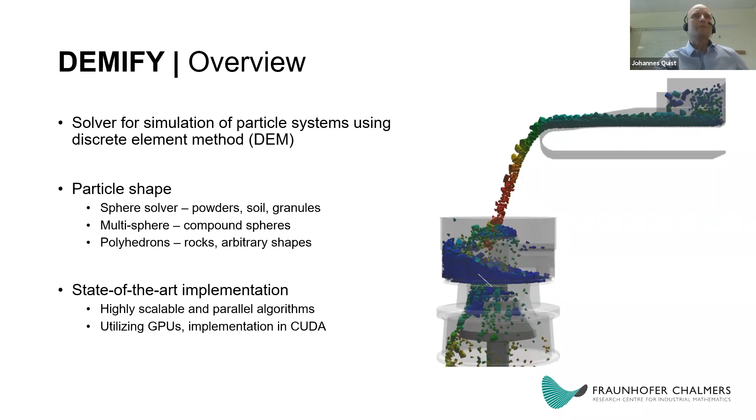DEM very briefly works essentially like this: you set up some kind of input for this particle system with geometry and particles and so forth. Then we need to identify all the contacts between all the objects in the system, calculate the forces, and update the positions and velocities. Afterwards we can have a look at this and post-process the data. But those are the essential steps.

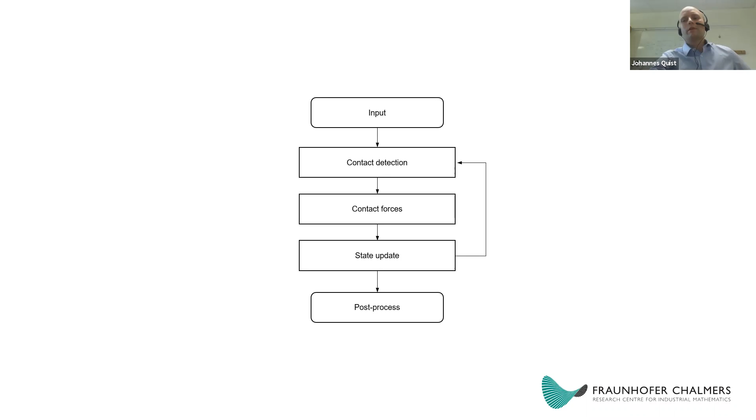The key here is to be really, really efficient in these main steps, and that's where you get the major performance leverage. So I will start with going into some technical depth, and then we will go into some case examples where we look at two different cases where we have used the DEM code.

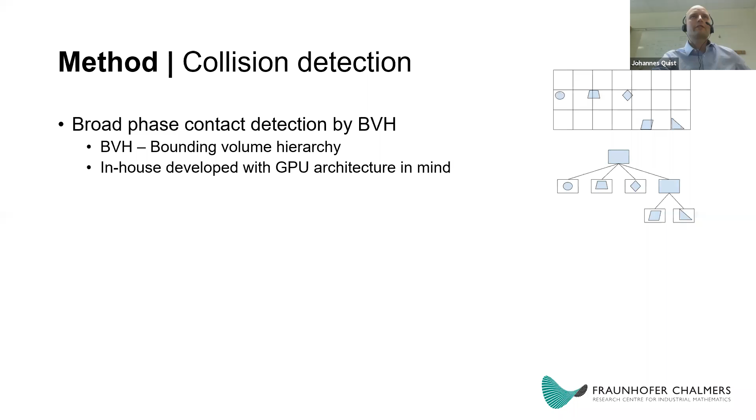Collision detection we do with something called bounding volume hierarchies. This is the way that we identify which particles are close to contact, and this is implemented on the GPU as well, making that search very fast to find contacts. Then we calculate the specific overlap between particles to calculate the forces.

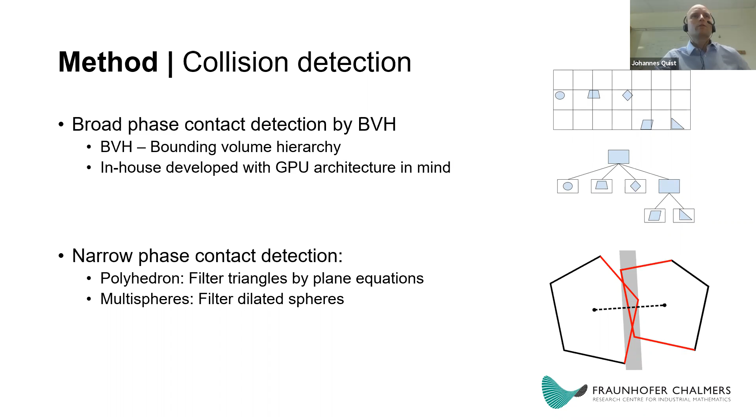We do that in a very specific way that's very efficient for polyhedral particles. Historically, a lot of DEM implementation has been with spherical particles, where the overlap calculation is very simple. When you move to polyhedral particles, it becomes more complicated to calculate the overlap between triangulations. So Adam Bilock has developed a very efficient algorithm for this.

First, the triangles are filtered by plane equations, and then we compute the intersection nodes. From that, we can compute the properties in terms of the overlap. This implementation scales near linearly with particle resolution, meaning that if we increase the number of triangles per particle, it scales near linearly.

The implementation that Adam has done enables us to have non-convex particles, so they can have more rock-like shapes, and this is critical to properly model rock particles. You'll find in literature that a lot of codes only handle convex particles, and it's a bit more complicated to achieve this property of non-convex particle shapes.

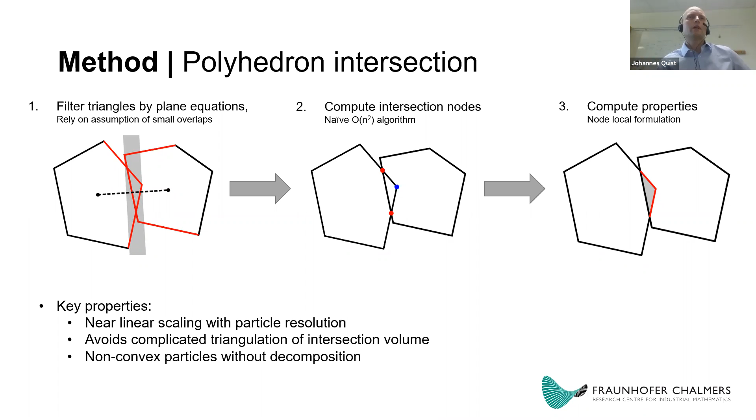We do the force calculation based on the volume overlap. I wanted to illustrate this because most other codes do it based on the distance in the overlap. But if you look at this image, these have the same distance in terms of overlap, yet this is the same particle oriented in 3 different ways, so the volume will be totally different compared to the distance. So volume is a better and more accurate input to the force contact model.

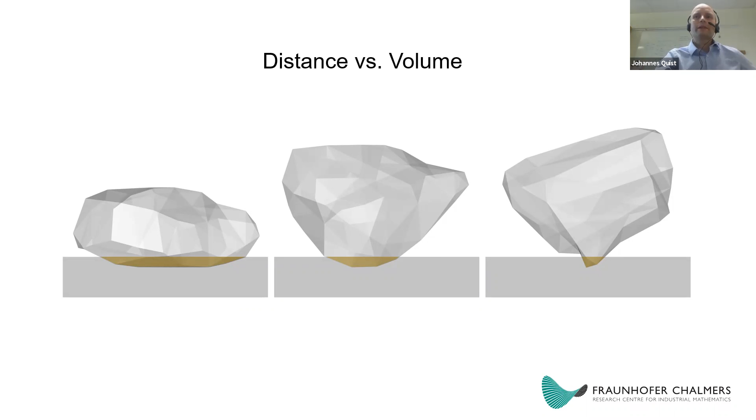So how do we arrive at different shapes? What we have done is 3D scanning of rock shapes. Here you can see 3 different shapes, and in this image they are made up of 100,000 triangles, which is way too much for us to include in the DEM simulation.

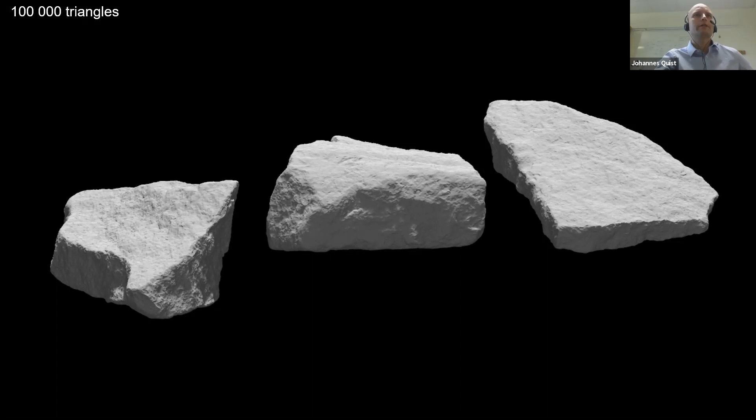So then you can apply an algorithm to decimate the number of triangles, going down to, for instance, 1000. You can see we lost a lot of the detail resolution, but we maintained the general shape. Then going further down to 60 triangles, that's much fewer, and that's something we can simulate, but we retain the general overall shape of the particle with its non-convex features, aspect ratios, and general particle shape.

Okay, so that's about the shape.

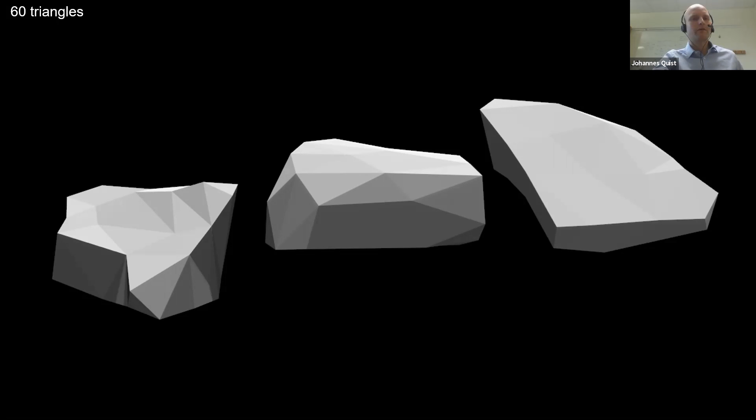What I had some issues with in my previous DEM modeling life was how to efficiently interact with DEM software as an engineer. So we have been working a lot with different interfaces so that it should be streamlined for the engineering context when you actually use DEM for real engineering projects.

So we have two main interfaces you can use to build up the DEM model. The first one, we have configured the core, the Demify core, so you can import it as a regular Python library. If you're familiar with Python, you realize this is very versatile and easy to get going with. It's also very good for setting up batch simulations if you're doing optimization or evaluating parameters. Because you're essentially accessing each of the sub-modules in the DEM core from this Python module, you can do whatever you like and build very advanced DEM setups.

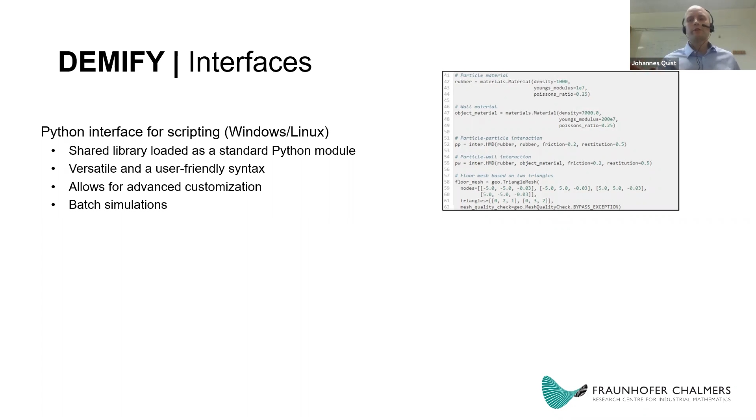Still, maybe this is a bit for the advanced user, so we also have the graphical user interface. This is built on something called the IPS platform, a software platform developed at FCC. There are 7 or 8 different modules for robot simulations, cable simulations, virtual paint simulations and so forth. The IPS platform has hundreds of customers and thousands of users, so it's very good for us that we were able to utilize that platform for building the graphical user interface. We can do both the pre-processing and running the simulation, and then also post-processing inside the IPS.

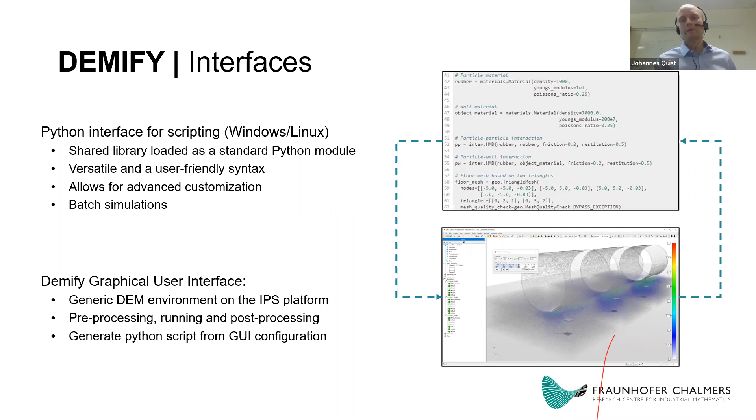What we have recently developed is a capability that when you run the simulation in the GUI, it will automatically generate a corresponding Python script. And of course, simulations run in the Python environment can be opened and post-processed in the GUI. This is very good because in the GUI, when you position geometries and do the basic layout, it goes much quicker since you can directly review what you're doing. But then you have great power in the script interface for moving forward with batch simulations, for instance.

Okay, so this is the graphical user interface, and I will quickly go through the different steps to set up the DEM simulation. Basically, you see all of the different parts here in the tree structure.

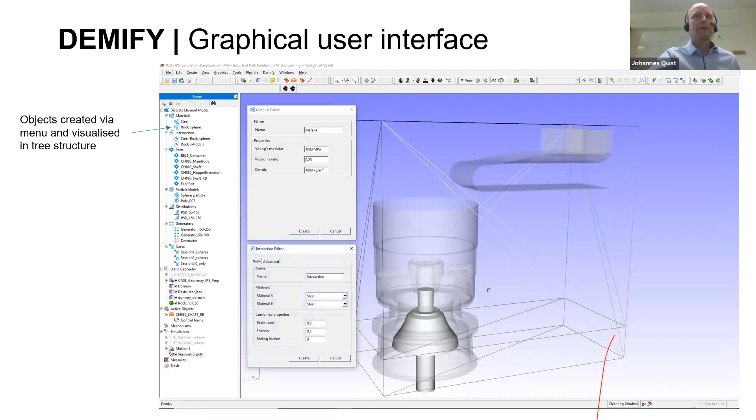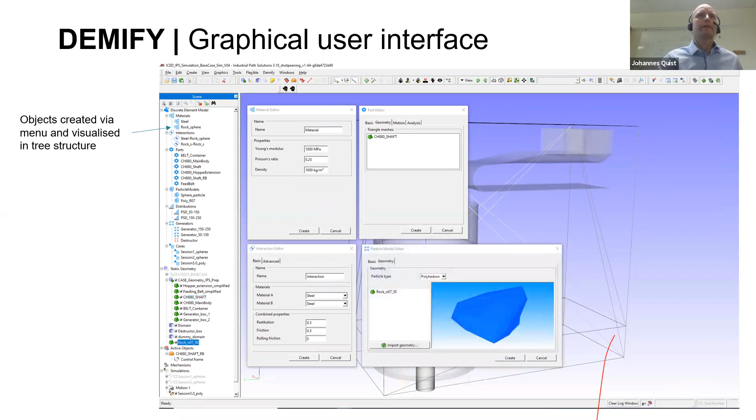So we start with creating a material. We can define interactions between materials, for instance the friction and coefficient of restitution and so forth. Then we can create the DEM part, and you can import any number of geometries into the tree and use the ones you'd like for a specific part. We can create particle models, in this case a polyhedral model, by just dragging and dropping in a shape like this.

We can create particle size distributions of different kinds, and then a generator, that's where we insert the particles into the simulation. For instance, we have the frequency of insertion, when it will start and stop, whether we define it by number of particles or total mass. We can also move this generator in the domain, and we can have arbitrary shapes where particles are created.

Then we also have something called a destructor, and we can use that for defining that if particles enter that domain, they will be removed from the simulation.

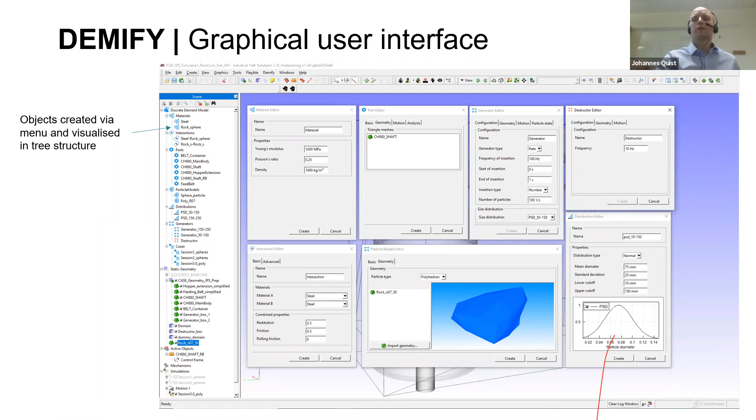This is a feature that might look like a detail, but it makes a huge difference when you work with this tool as an engineer, because from these building blocks you can build any number of case recipes. So if you're evaluating 3 or 4 different conceptual solutions, you can build all of those case recipes in the same scene and run them, then open up and review those results simultaneously, which is not possible in other software.

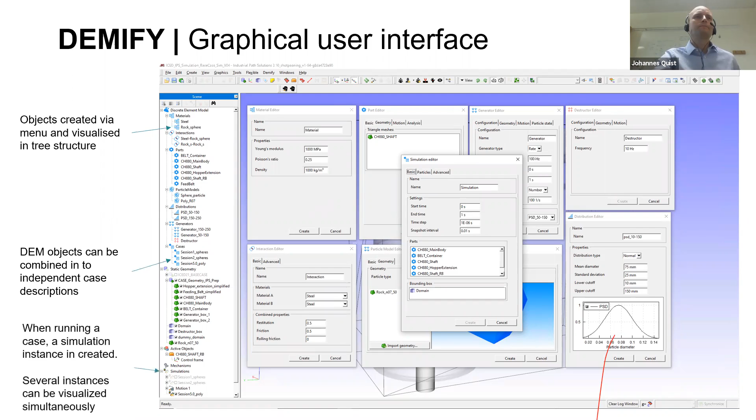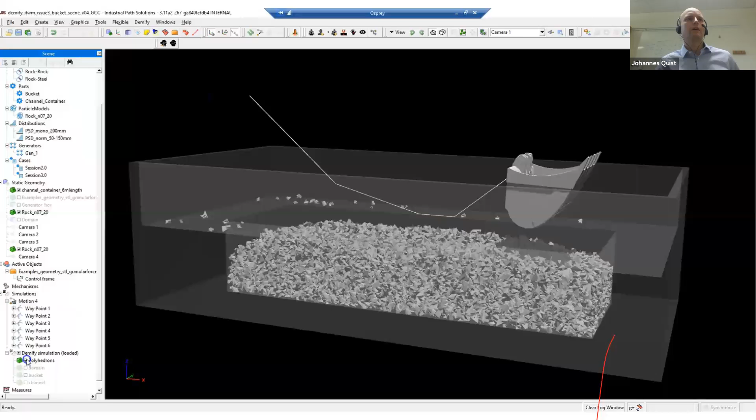I also want to show something about working with movements and motions. I've sped up this video by a factor of 3. Here we can define something called waypoint motion, so this excavator bucket moves along this line. I've already performed the simulation, and you can see how this bucket moves down into the material and digs through. You can also change the color using different color schemes, and we can have predefined camera positions. Here I'm lowering the transparency just to see what's happening inside the pile.

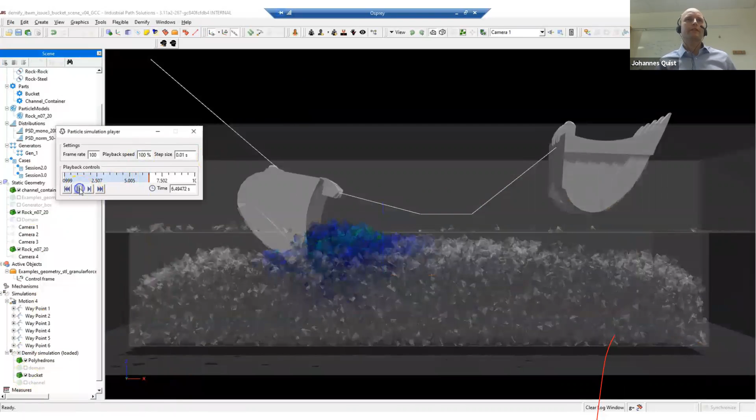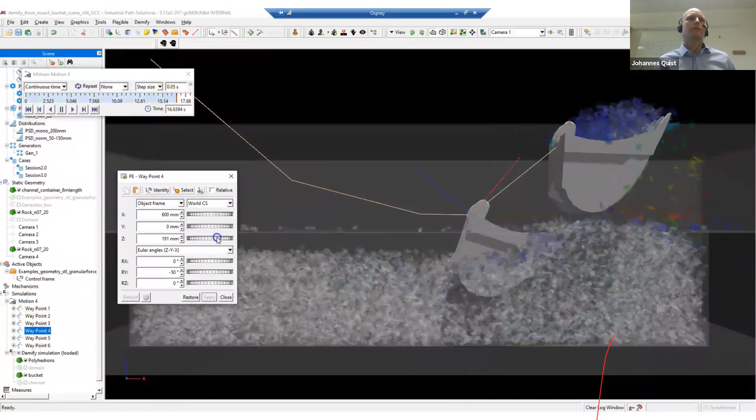Because of the independence between the definition of motions and the DEM simulation, I can go into this motion and modify it if I want to make a separate new version of this waypoint motion. So I just lowered one of the waypoints, and then I can run the simulation again and get a second version. You can work iteratively like this, which is very good from an engineering perspective.

I just want to mention we have spent quite some time on building an API and documentation, but let's not go into too much on that.

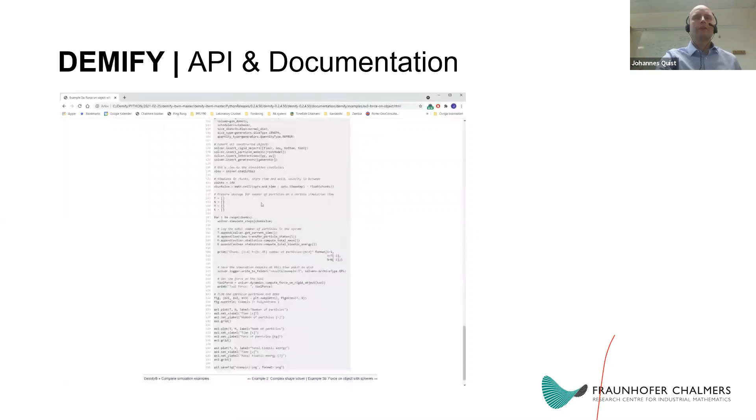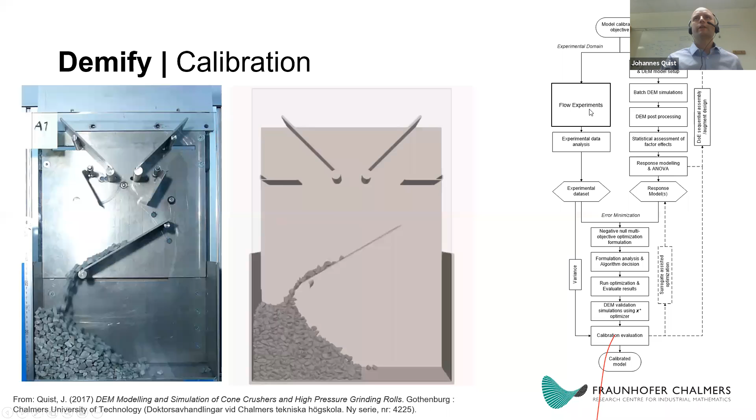I would also like to mention the key importance of calibration. This is something I worked on previously. We have a methodology on how to work with experiments and simulations to arrive at a calibrated set of contact model parameters.

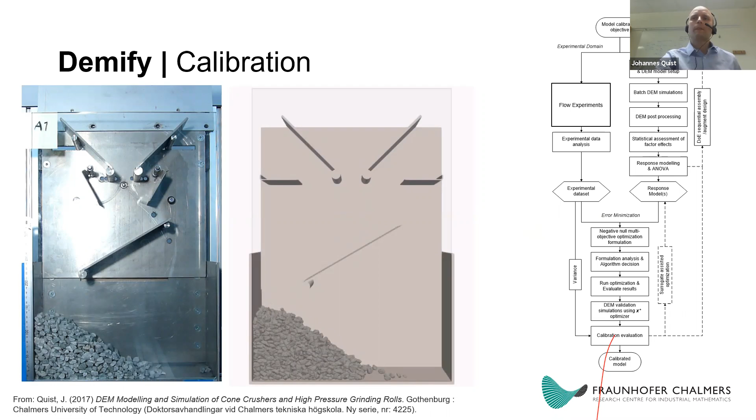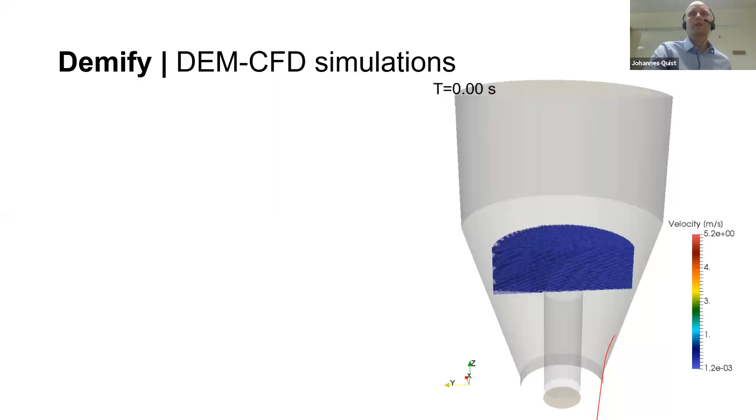It's important to mention that we worked a lot with DEM-CFD simulation, and I know some of you have also done that within the GCC. Mainly we have worked together with the pharmaceutical industry. This is an example of a Wurster coater. In this simulation we have 1.5 million spherical particles running on the GPU, and this is used by a large pharmaceutical company on a day-to-day basis in their development and process work.

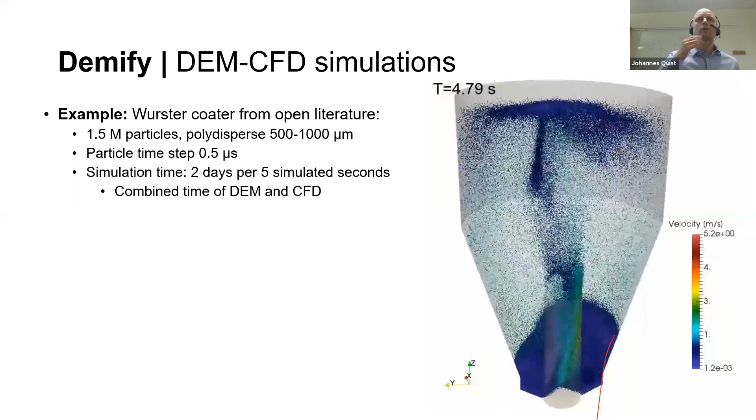I would now like to demonstrate a project that we have been working on for the past 1.5 years. It is not a project within mining, but within infrastructure. I think it's still relevant because it involves rock material and a different kind of machinery, but I think you will see some links to minerals processing equipment if you just use some imagination.

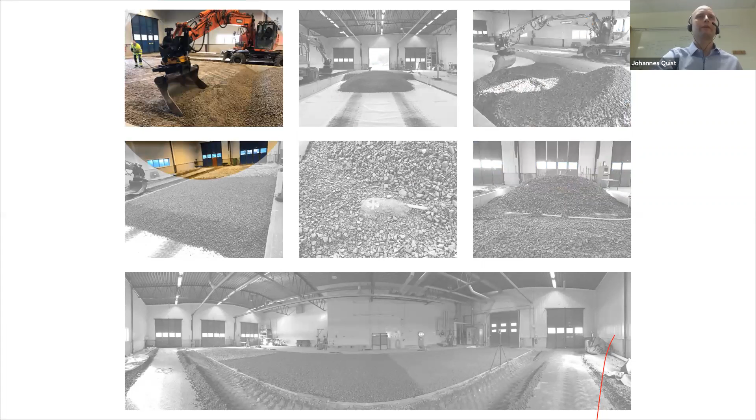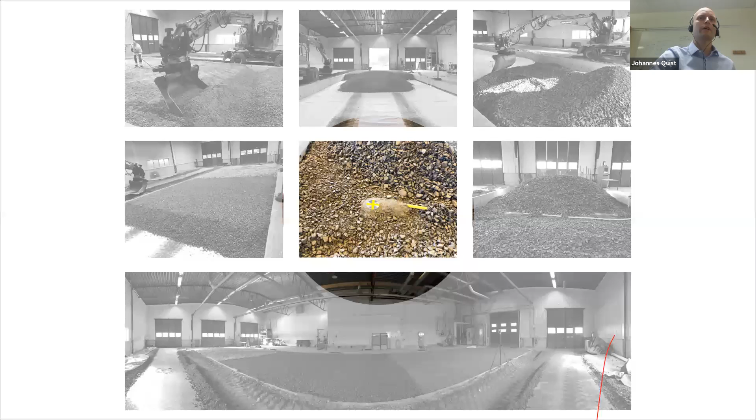Here in the top right corner we see the 8 to 90 millimeter material, and here we have the 0 to 32 millimeter base course aggregates. We also buried pressure sensors to be able to measure the forces and pressure inside the bed to compare with the simulations. And here is the final bed ready for the experiments.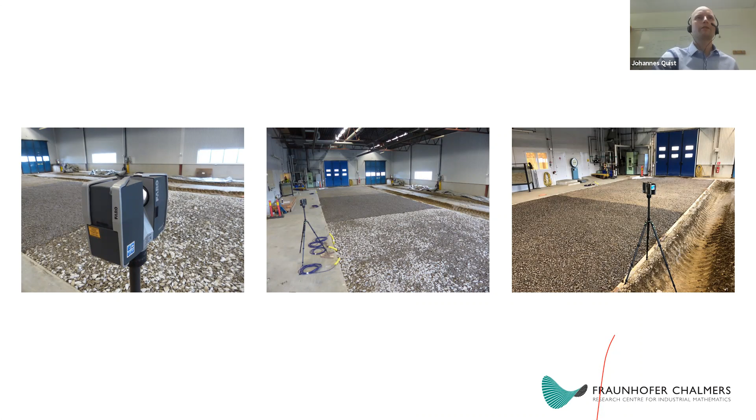We also utilized a lot of 3D scanning. We scanned at 6 positions before we started moving across the surface, and then after every second passage with the roller compactor, so we could use that 3D scanning data to extract sub-areas for estimation of deformation. These surface plots show the point clouds for 12 passages, and from that we can extract the deformation as we sequentially pass over with the compactor.

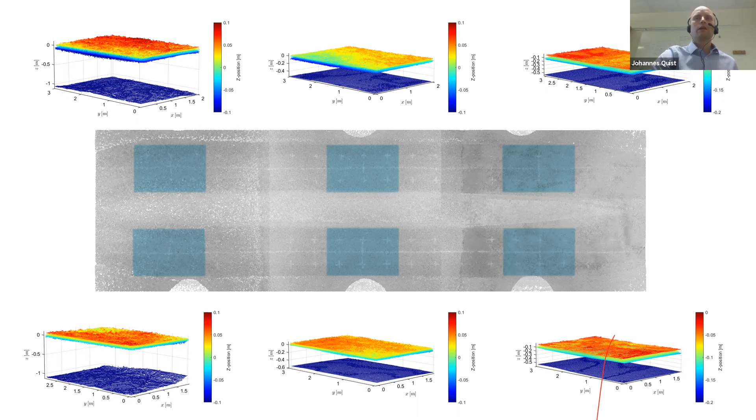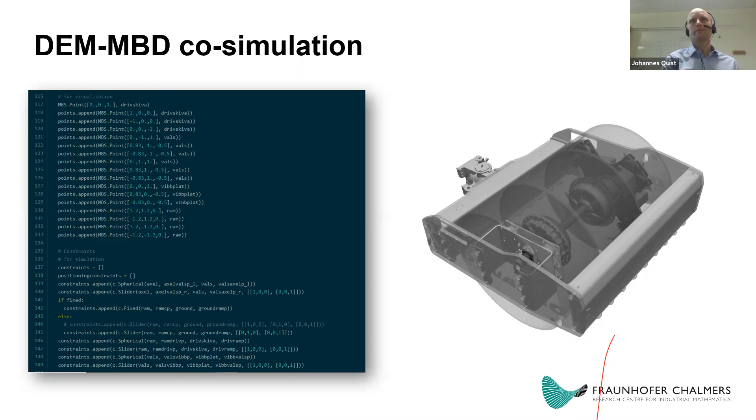And there's quite a lot of details regarding the simulation of this system. We had a master thesis last year, and Johannes Göransson was the student, and he built a complete multi-body dynamic solver in Python that he then linked directly into with the Demify Python interface. So the complete dynamics of the roller compactor has been modeled and is included in the DEM model, including the stiffness of the rubber buffers and the stiffness of the frame and so forth.

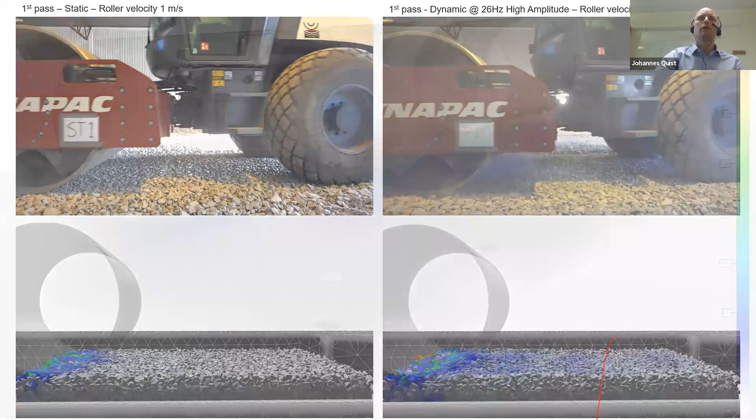Okay, so jumping forward, here's the comparison between the experiment and the simulation. First for static and now for the vibrating case. And here we can see, to the left, the static passage, where we just roll over without vibration.

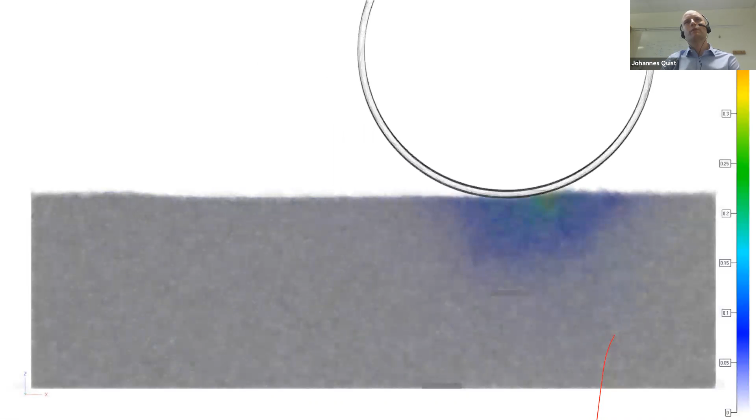And then you see the first and second dynamic passovers. From the side with some transparency, we can see the movement of the particles below the roller, now with the static pass, and then here with the dynamic pass. Those of you who work with HPGRs should take notice here in terms of this coupling method and so forth.

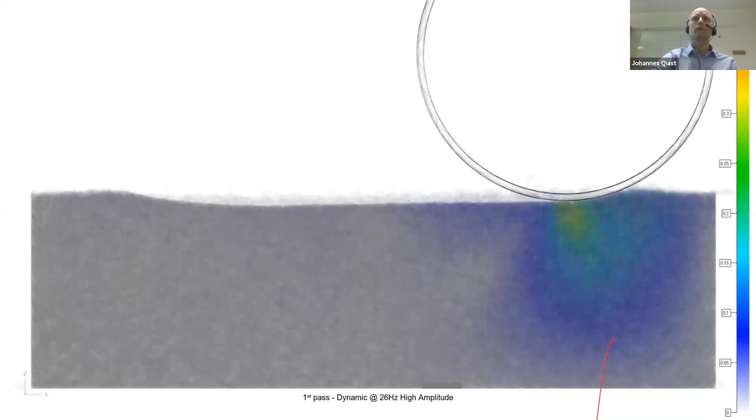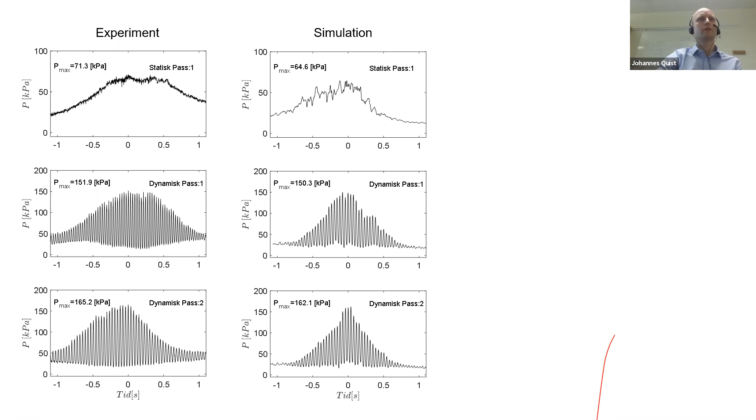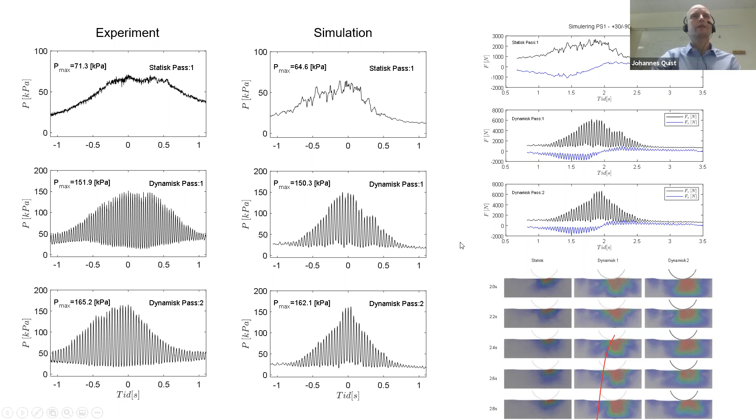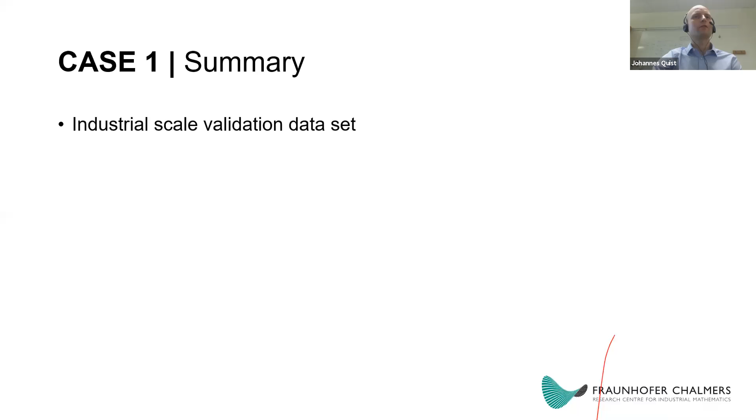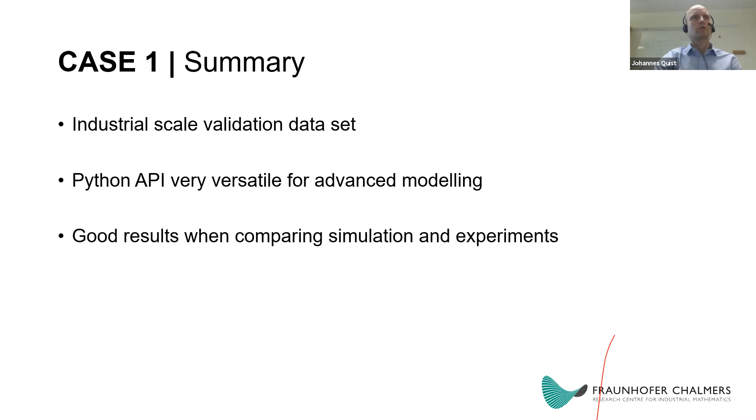So summarizing this first case, we have a very good industrial scale validation data set to move forward with publications on. Setting up this experimental campaign is based on the knowledge I've acquired through surveys done in the minerals processing industry. This case also shows the versatility of utilizing this Python API in Demify for advanced system modeling. We're quite happy with the simulation results so far, but there's more to be done for sure. The next step we're working on now is to implement this solution with the clients, to integrate it in the R&D process for developing these roller compactors.

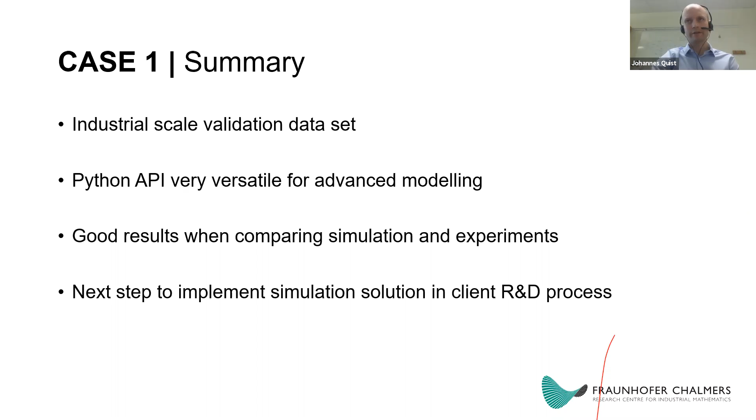Okay, so now a second case example. This is a project we did earlier this year. I cannot disclose the client, but it's in the mining industry, and it concerns the feeding of a recycled cone crusher. We did this project in collaboration with the Liner Design Service and Rock Team.

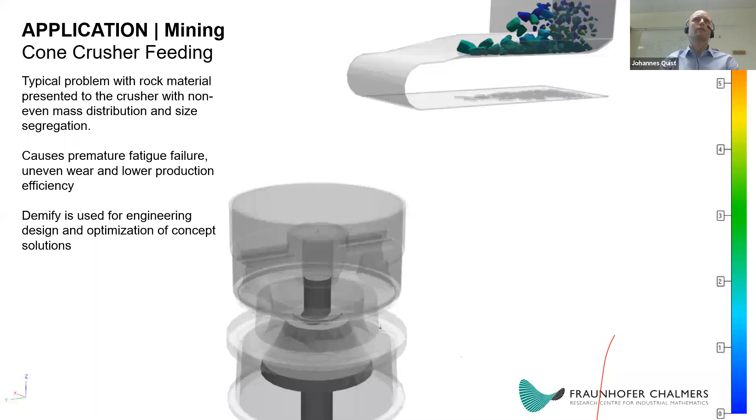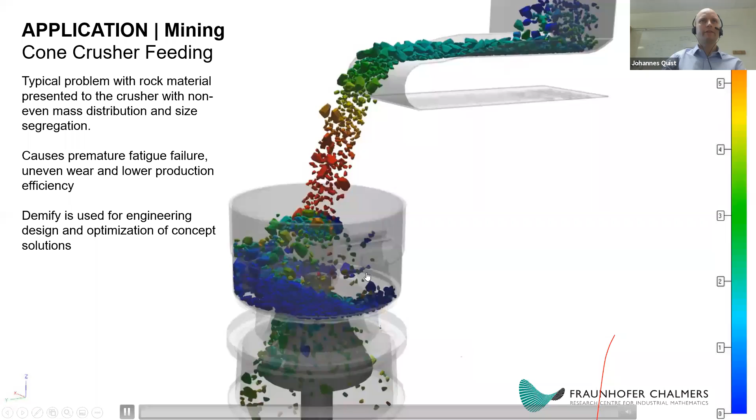Before showing the results from that project, I want to show the generic situation of feeding a cone crusher. It's very common that they are fed like this. In this case, the particles hit the spider cap pretty dead on, but the momentum of the large particles causes a splitting action, so the larger particles end up over here and smaller particles flow down here. We also have more material on one side than the other. This breaks crushers. And as Magnus usually says, all crusher performance optimization starts with proper feeding.

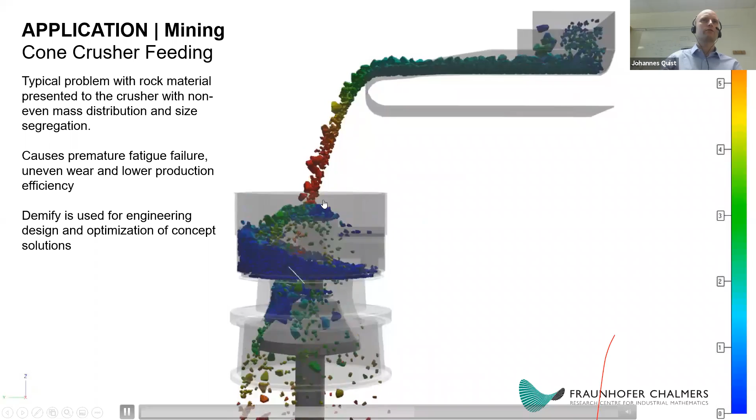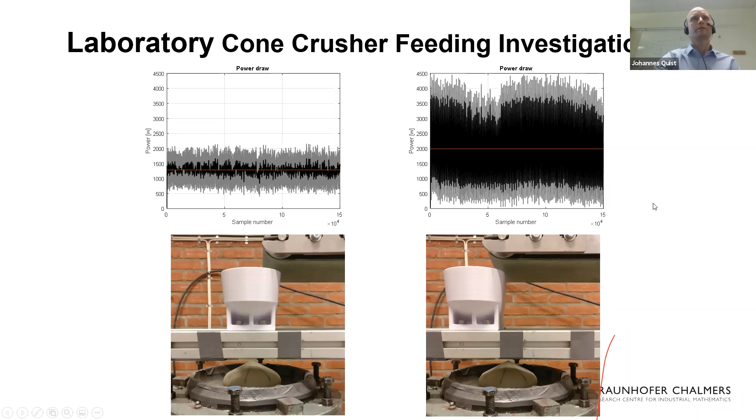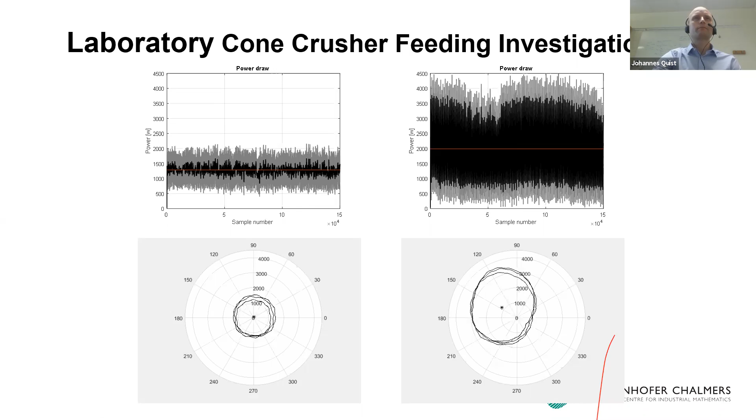So we always start with simulating the current arrangement, because if we cannot replicate the current situation, you shouldn't really go into concept evaluation. So that's always the first step.

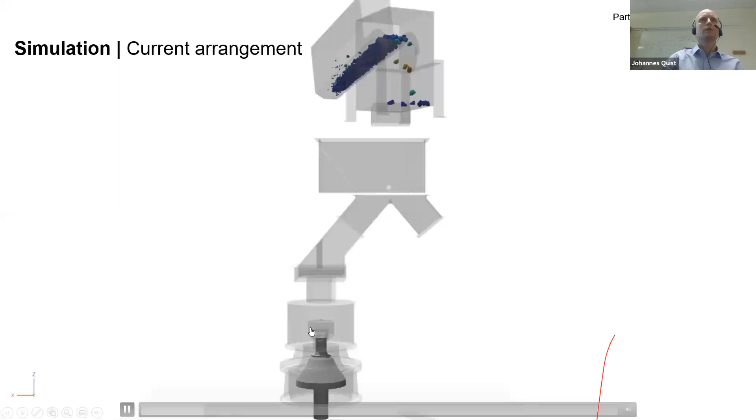So we worked iteratively to do that, and that might mean you find geometrical differences on drawings. You might need to 3D scan the actual geometry. Sometimes there will be ledges, like in this case, this ledge had been welded on. Without that, you have a completely different flow behavior.

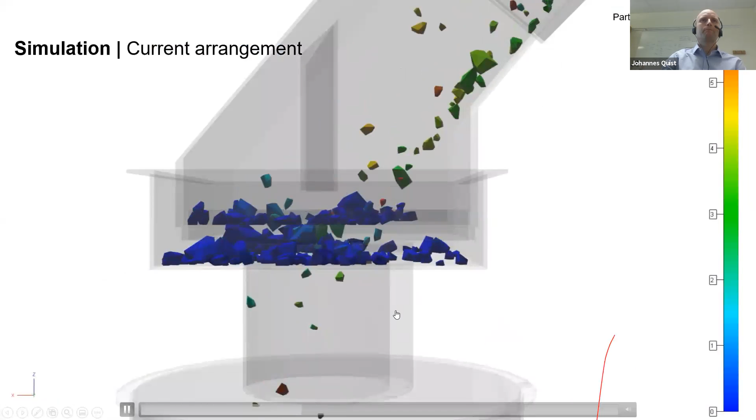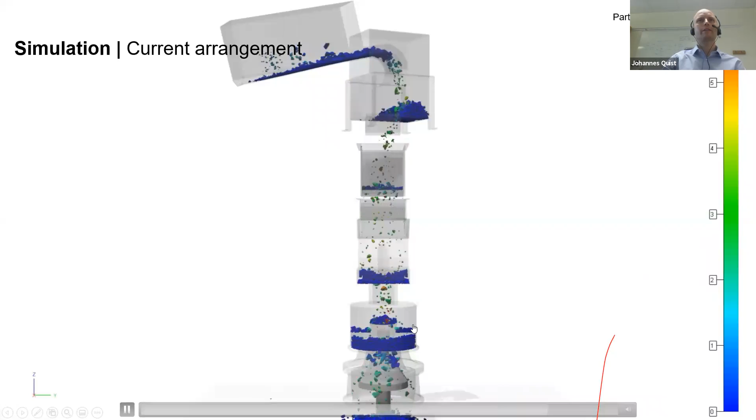So we'll skip ahead a bit here. Basically, we found that this crusher will be, under most circumstances, have a misaligned feed. So that was the conclusion from the first step.

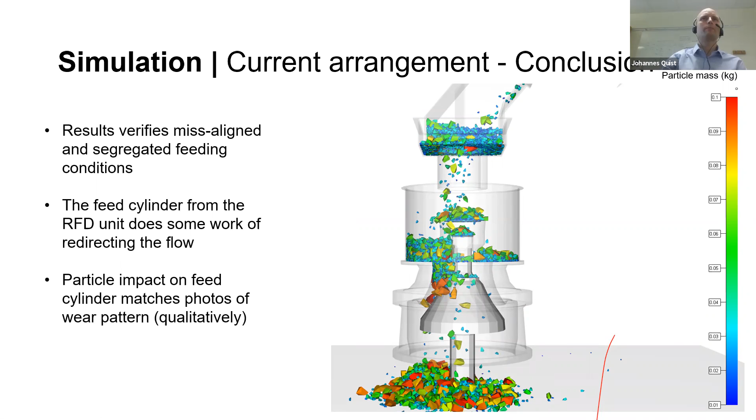Okay, so we could verify that problem, and we can also see that the wear pattern makes sense that it wears on this pipe here.

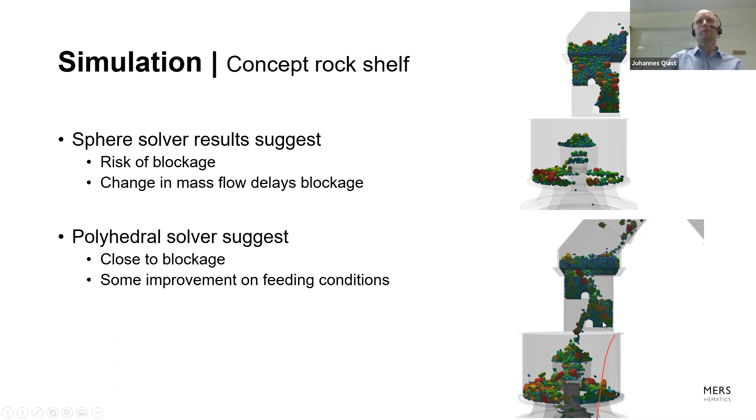So then the concept solution had already been proposed, consisting of a rock shelf design. And we investigated if that would be a proper solution. And we found that there's a very high risk of blockage. You can see it here with spherical particles, and it's very close to blocking when we simulate with polyhedral particles.

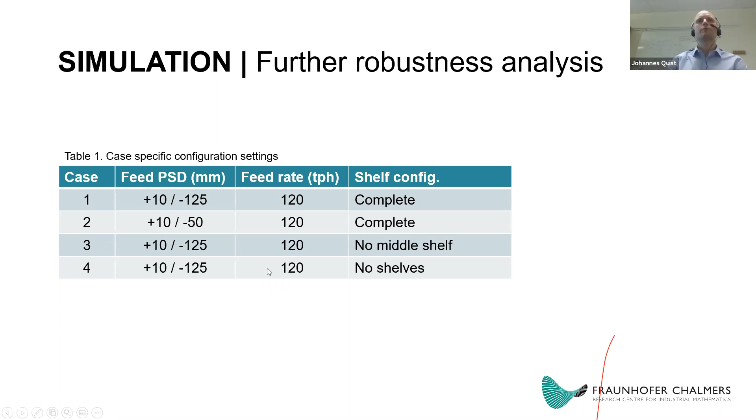So then we moved forward to see, could we investigate that concept to make it function? We simulated a couple of different states, and we separated the distance between these shelves to open up the solution. And the way we did the analysis was that we compartmentalized the crusher into 15 or 16 different domains.

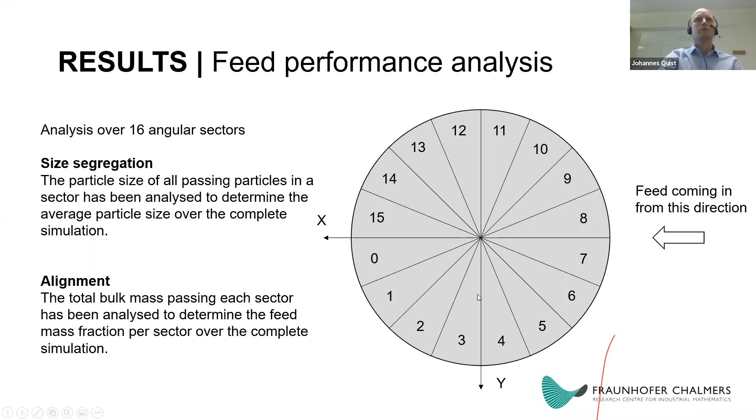And here we can measure the mean size in each of these domains, and also how much mass we have. For perfect feeding, we want equal mass in each one, and we want equal size distribution in all of those. Then we have something to measure and optimize against.

So here we can see the four different cases that we evaluated in terms of the alignment. And for perfect alignment, we want all of these bins to have the same height.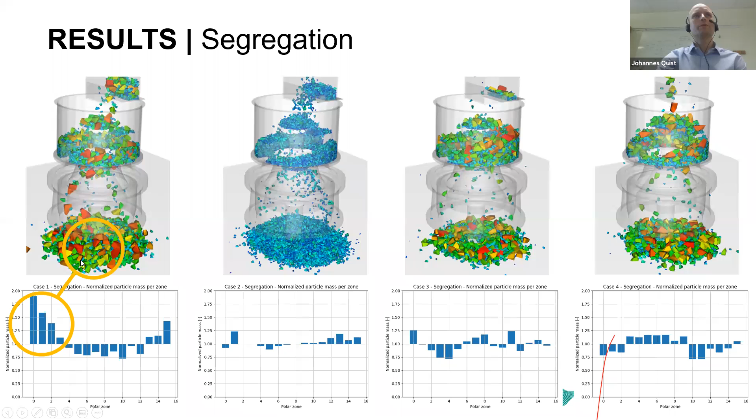And this was a quite interesting case. First, we didn't realize why we get large particles in this corner. Is that an anomaly? But when we investigate that further, it seems like it's not an anomaly.

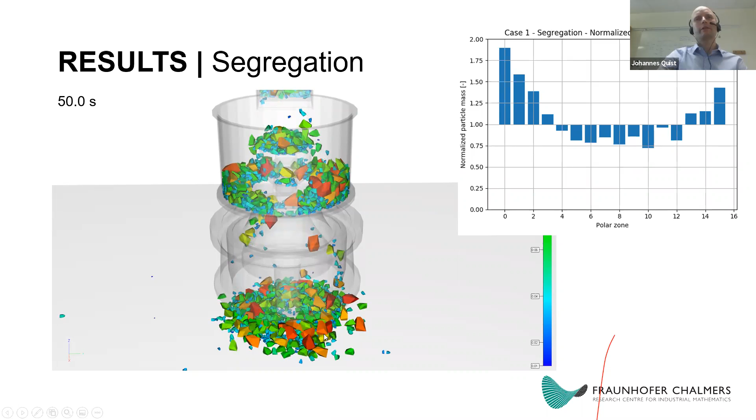Because you can see here progressively that coarser particles end up in this quadrant. Looking at the details of this system, when particles move in the head chute, they bounce against this wall, and then they have a tendency of going over here. So you can sort of see that happening here.

So now we are into quite fine-grained details of the flow, to be able to pick up these kinds of differences.

We'll jump ahead. So here we color by velocity, and here we color by mass. If we jump ahead, we'll see it's possible to sit here and track the coarse particles and have a look at where they end up. And of course, they will go a bit everywhere, but they will predominantly move to one certain corner.

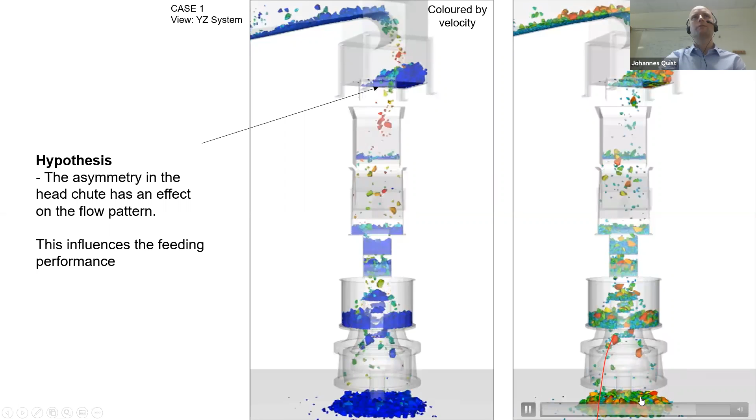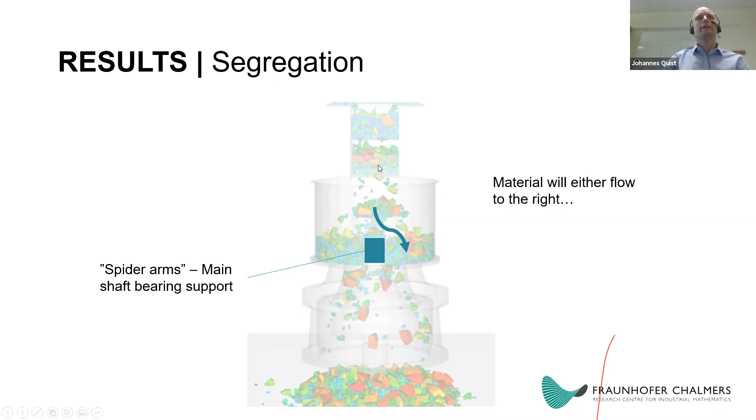Looking at this, it sort of matters where the spider cap or the spider arms are located, because a coarse particle can either go to the right or go to the left. So if there's a bias going to the right, we will see that effect in the distribution later.

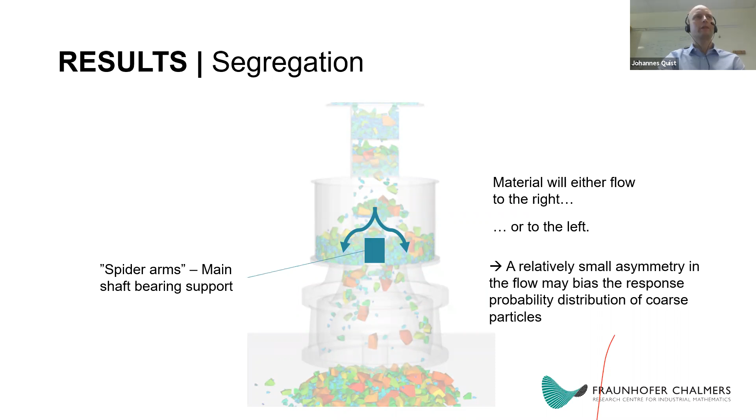So just to summarize this case, we did it in quite a limited amount of time, and it was a lot of fun, a great project overall, with collaboration with Liner Design Service, the rock team, and of course the site.

And we also got this very nice statement from them that this was an extremely well done analysis and helped engineering significantly. Now I sound like a salesperson maybe, but I was of course very happy to receive those comments from the site.

It's a different thing working in research projects and then moving into these very sharp industrial cases.

Okay, so that was those two cases. I want to show something that is very fresh.

This video was... I mean, you can't have a DEM simulation without including at least one video done the same morning. That's something I learned from Paul Cleary, that's just how you do it. So let's do that. This is a simulation.

This is a polyhedral solver, but it's called a dilated polyhedral solver. So it's a Minkowski sum of a sphere and a polyhedral. And this allows for very, very efficient overlap calculations.

It means that for now, in this solver, we only use convex particles. But what you see here is actually 1 million convex polyhedral particles with 20 triangles per particle. And it's been running 2.5 seconds of simulation for 5 to 6 hours on a quite cheap regular gaming card. So this really is promising in terms of performance, including for this kind of shape.

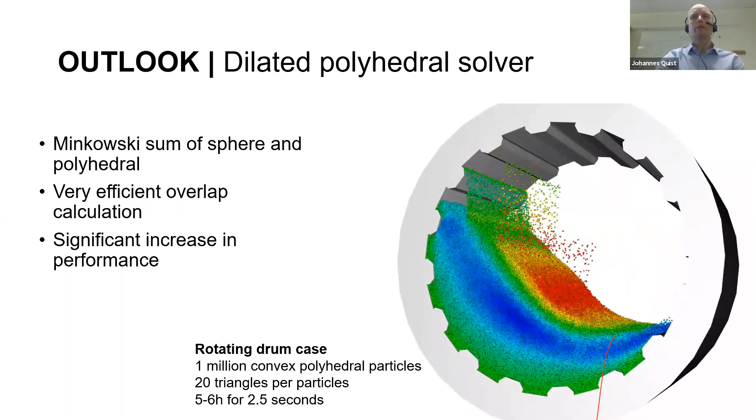Also, as some final conclusions - we have been developing this solver and code based on funding we have received from public projects, but also industrial projects. And we're now entering a phase where we would like to roll out and launch Demify so that others can start using it. We are open to discussions regarding how to do that and in what way.

Within the GCC, perhaps the most easy and straightforward approach would be if we have a collaboration project, for instance. Then it's very straightforward and we don't have to do much else than just share the code with some agreement. But of course, if you would be interested down the line to test Demify, let's have a discussion on that. That would of course be great fun.

And then for industry, so far we have a couple of industrial users. Usually it starts with consultancy projects where we do in-depth development of specific applications. We have some niche applications where it's very difficult for an engineer, on industrial time scales, to model advanced systems. So we work directly with companies to develop those systems, and from that development project there's a transfer to a more normal license agreement. We work a bit differently, case by case.

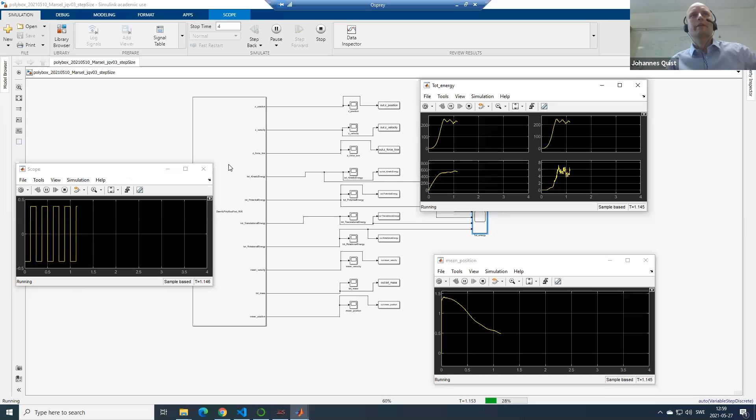I realized I forgot to mention, you can also build the Demify Python code as something called an FMU. Here I'm running live now from Simulink. You can build the DEM model and then just import it as a block, and then utilize the complete hydraulics and multi-body dynamics, whatever you like, in Simulink.

So I think this is also very interesting—for instance, I would like to build an HPGR model completely in Simulink and then run it with the FMU. That versatility of the Python code, I think, will be very good for comminution modeling as well, to model geometry and also system dynamics, control loops, and so on in the same system.